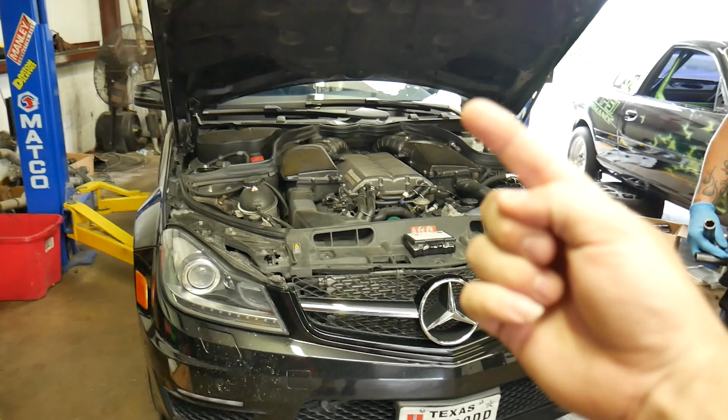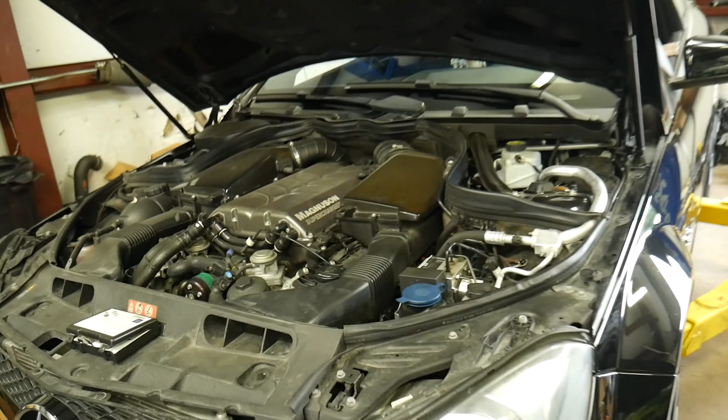Let's step inside the shop and see what we got cooking this week. I'm sure you'll remember this car, but the Supercharged Mercedes is back. I don't know if you guys remember, but I'll put the link up top of the video for when we put this Magnuson Supercharger on this Mercedes-Benz, probably close to 4 years ago now. Since then the car's been back for small things throughout the years. I think we've done plugs on it once.

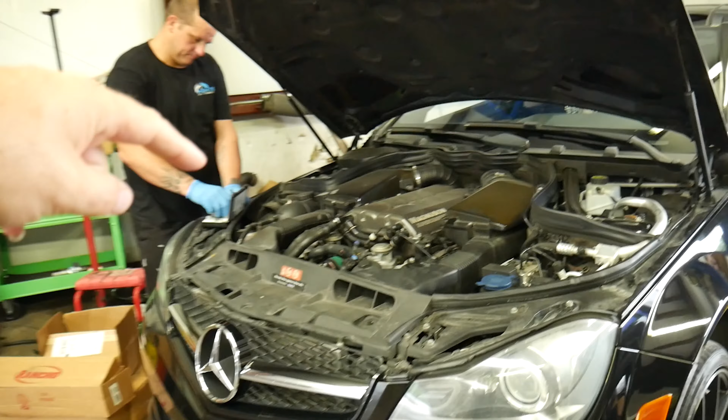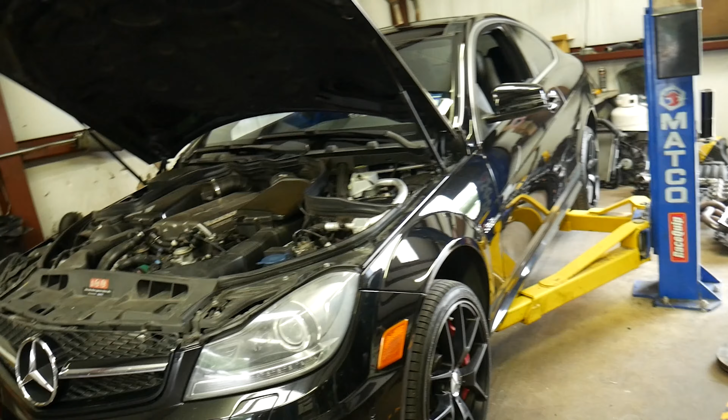I'm not sure, but anyways the car is back. Today we're going to be changing some pulleys, not the boost pulley, but some of the idler pulleys for the belt. We're upgrading those to metal pulleys, getting rid of the plastic stuff, and then we're doing some suspension work. I think we're replacing the shocks all the way around. So that's what we got starting off this fine Monday morning. Hopefully we get our new camshaft in for our Challenger right there. That's what we've got going on. Let's get it started.

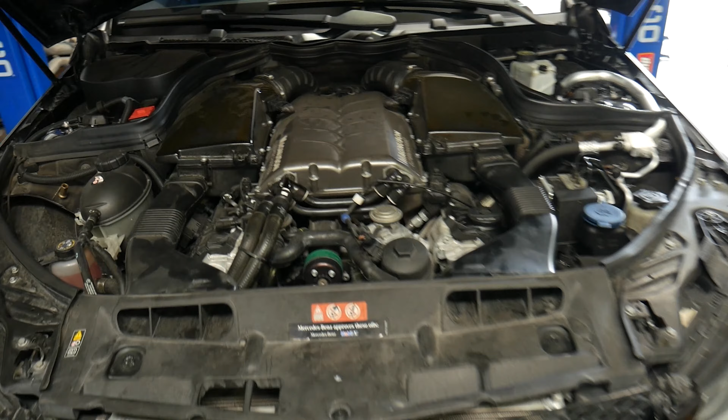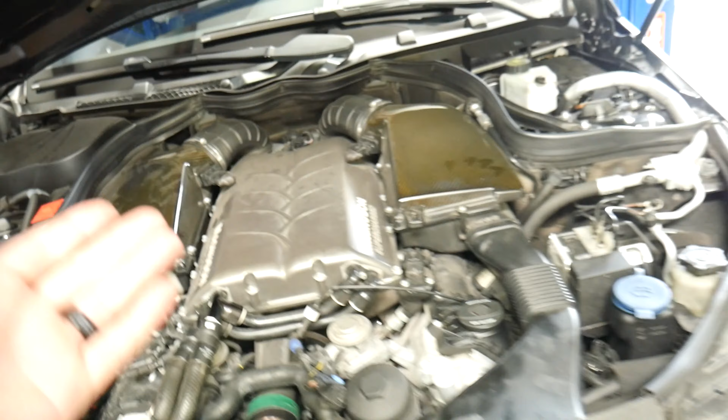So guys, we went ahead and got all of our pulleys changed. Basically every pulley except for the blower pulley and the harmonic balancer got upgraded to a new metal pulley. Now that we've got all of that on there, unfortunately the suspension components the customer supplied were wrong, so we did not end up putting new shocks on this thing. So that is it, we're done with the Mercedes. We're going to fire this one up, get it back outside, and get on with our next project.

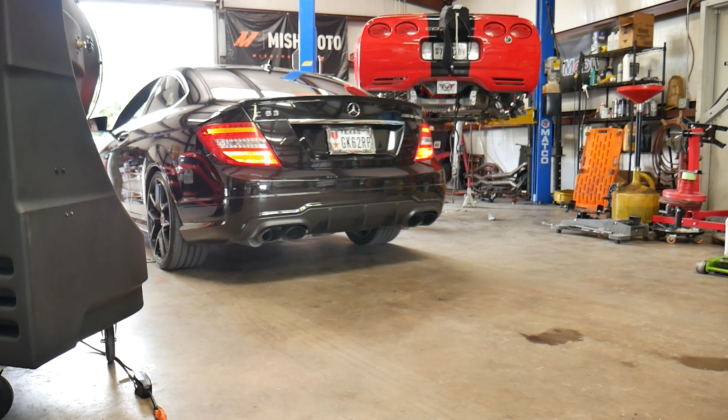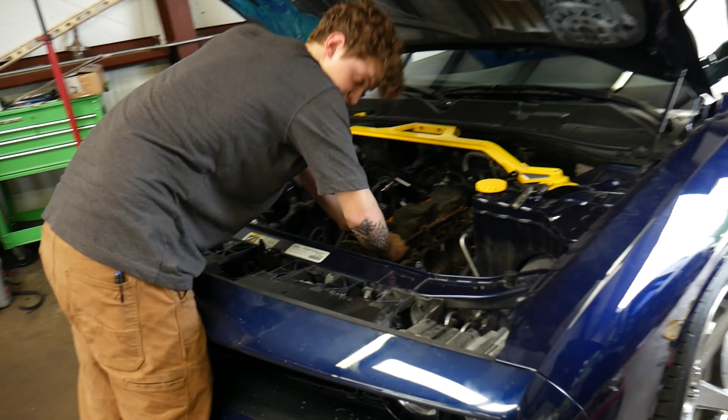As we move forward through our day, we've got the ECU working in our Procharged car, so I'm going to get to tuning that. John is over here working on Royce's, getting the axles put in. And as you can see, we've got somebody new over here. Lane, say hi to everybody. This is Lane, he just started with us last week, and he's working on getting our surfaces cleaned up because we should be getting our new camshaft for this thing in. So he's getting everything cleaned up in preparation for that.

So let's go ahead and get to tuning on this Procharged Charger. Okay guys, so I've got the initial changes made in the ECU for the Procharged setup. We're going to go ahead and make our baseline run and see what kind of power it's going to make.

So guys, we did end up checking with the customer, and it was running 89 octane instead of 93. So we pumped some of that out and put in 6 gallons of 93 octane. Now we're going to go ahead and get back to tuning.

Alright guys, that was a nice clean run. Let's take a look at what we made on, really this is our third pull, but let's take a look at it. So we made 463 horsepower, 492 foot-pounds of torque. Very nice. Let's see how close we can get to 500 on the wheel with this thing.

Another nice clean run, and we're about there. There's not much more to go. You know, stock engine, we're going to keep the timing real conservative. Air fuels are looking really good, and it's making clean power.

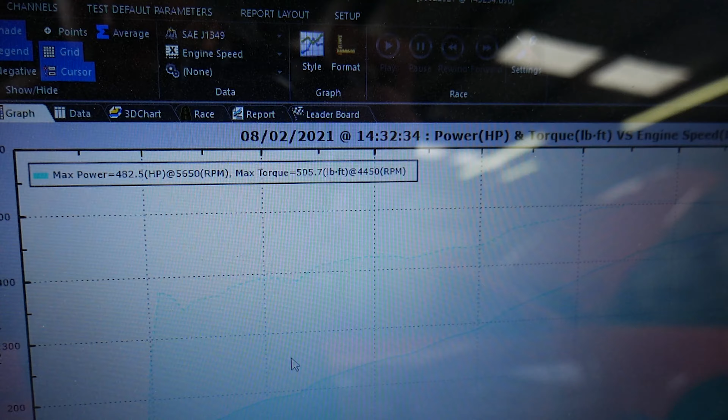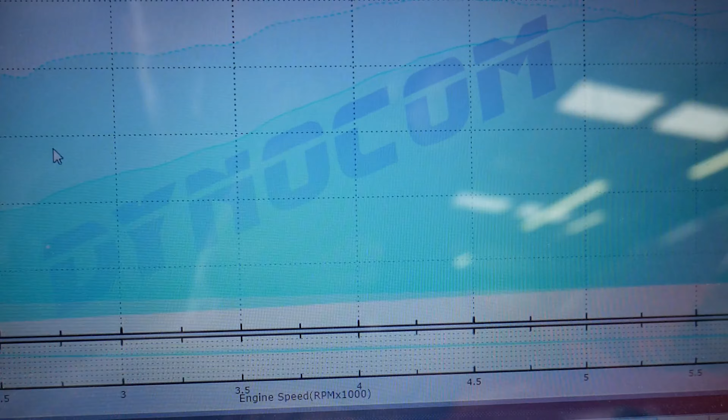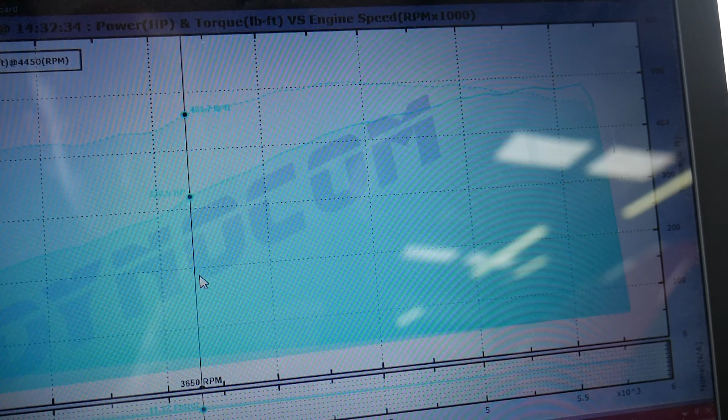So that last run, focus out: 482 horsepower and 505 foot-pounds of torque. Graph is looking really nice. And if we look a little tighter in here, we can see our air fuels, nice and clean. I'll lean it out a little bit, might clean it up a shade more, but right at mid-11s.

So let's step inside and take a look at the runs.

We're in HP Tuners here. I know I don't bring you guys inside very often, but I know some of you want to learn some stuff, so let's take a peek here at what we got on the screen.

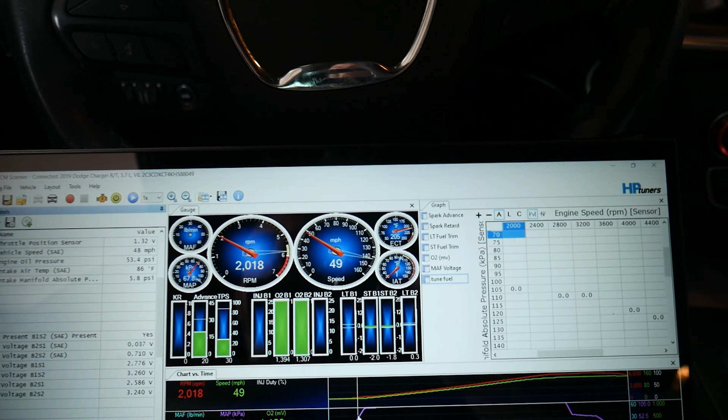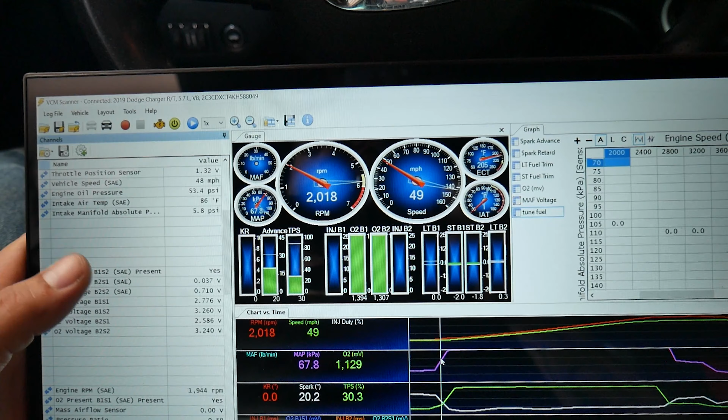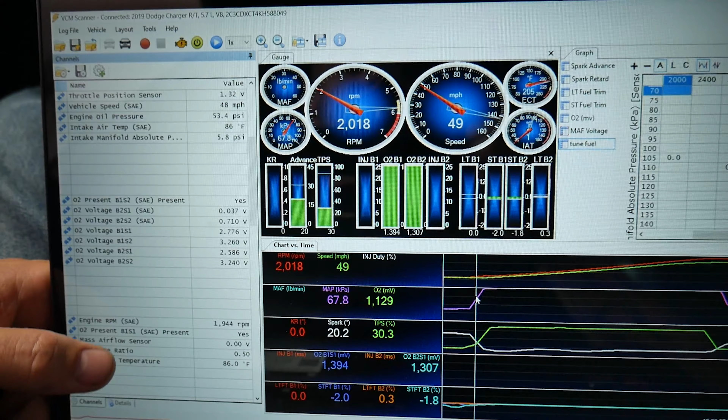Things I like to see pretty quickly: throttle position, vehicle speed, engine oil pressure, intake air temperature, and manifold absolute pressure so I can see how much boost we're running. We've also got oxygen sensor voltage readings, engine RPM, mass airflow volts, pressure ratio - if you know anything about tuning Dodges from back in the day, pressure ratio on the neons is an important table - and charge air temperature.

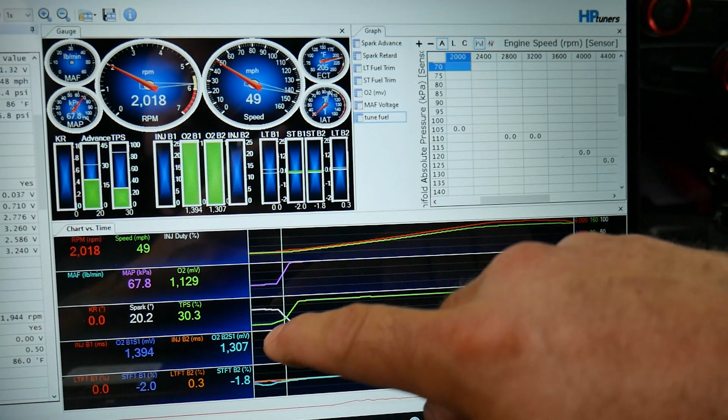Over here we've got map, RPM, oxygen sensors, and our long-term and short-term fuel trims.

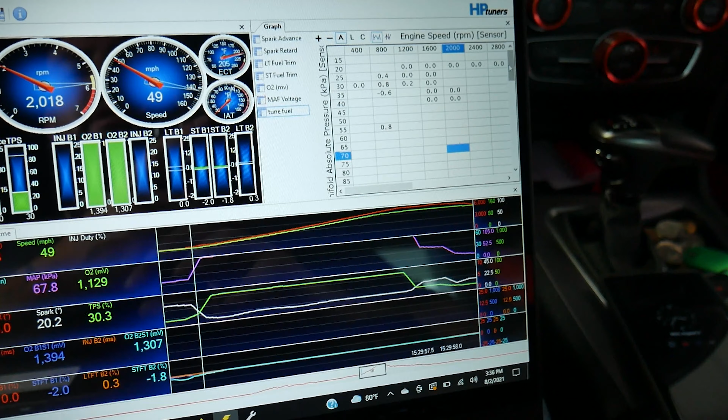Tune fuel over here is a table I built for doing Hemis - basically absolute pressure versus RPM. With this table, especially with the neural network turned off - not in this car, I didn't turn it off here, but if I'd done a camshaft, I would have turned the neural network off.

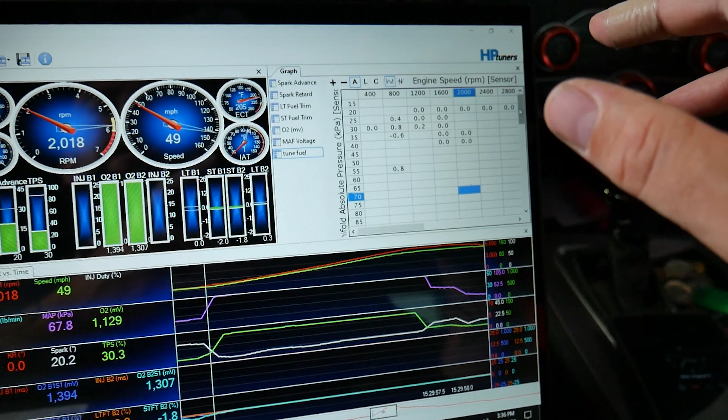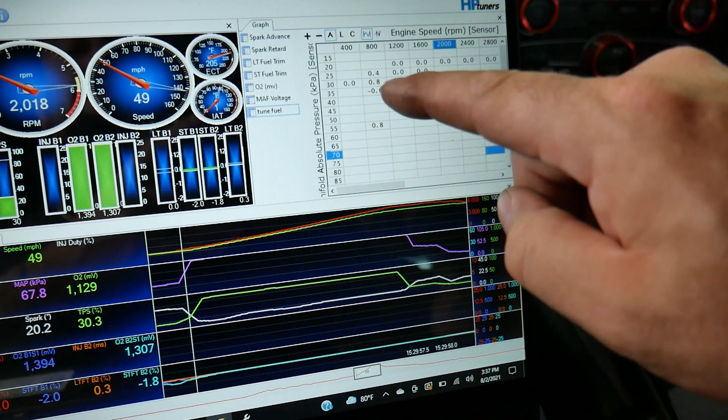But anyway, I use this table to help dial in the fuel table quickly because I can see plus or minus on your long and short term trims. This table is set up to identify the long-term fuel trims on both banks, take an average of those, and show RPM versus pressure.

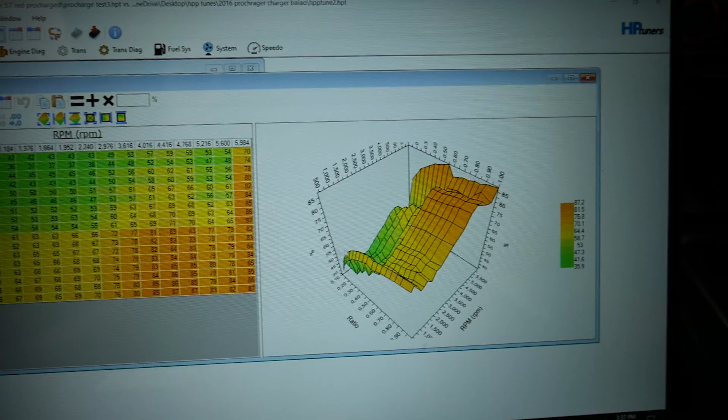Then I can copy and paste this table into - let me show you guys - airflow, speed density, VE. So this is what the VE table looks like, the factory VE table, or what it looks like.

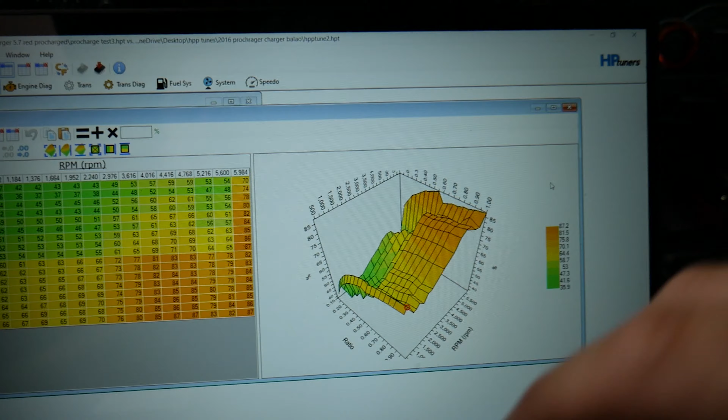I'm not going to go into explaining the neural network because there's a lot to it, but basically if I were to go in and start changing these numbers, it would have little effect due to how the neural network system works in these newer Dodges.

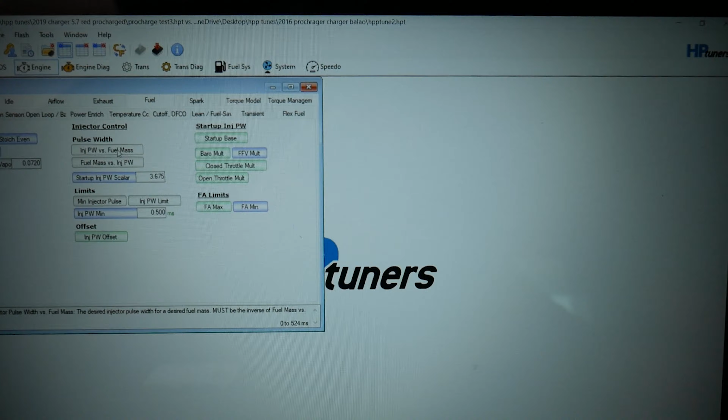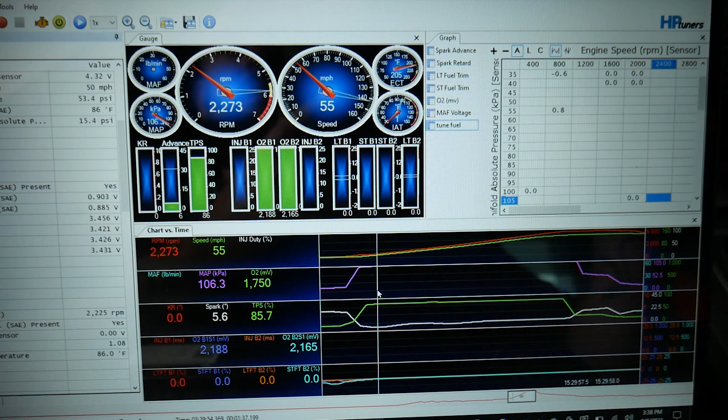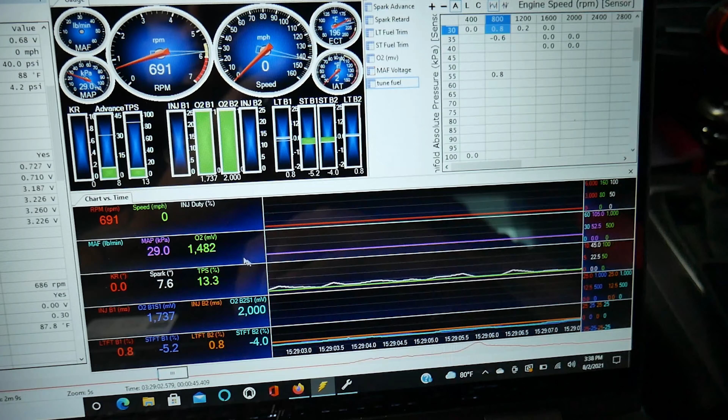We just did a blower, that's it - everything else is stock headers, stock cat, stock exhaust. So we're able to leave those systems on, and as you can see, our fuel trims are really nice, plus or minus 5%, barely even kicking on the long terms at all. Everything looks really good on the fueling.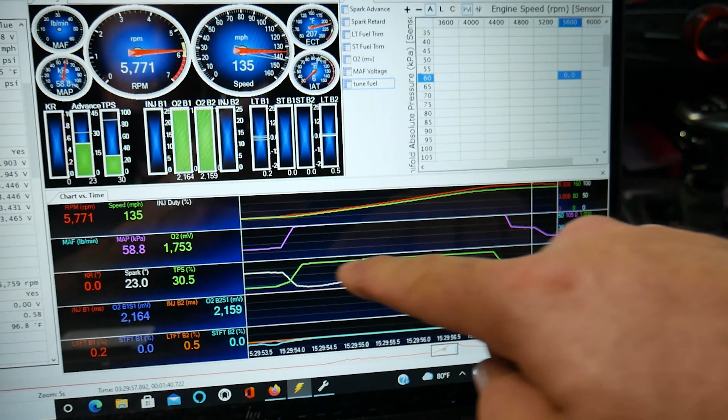Let me get back over here to where we were making the run on the dyno. Our green line here is TPS, and our white line here is our ignition timing. As soon as we smack the throttle, we pull the timing out of it, then slowly ramp it back in, holding about 23 degrees all the way to redline.

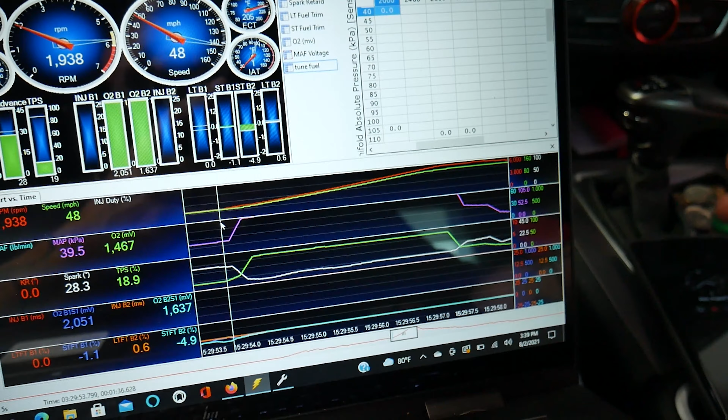But I just wanted to show you guys that real quick, and we're going to let the car cool down.

I'm going to go over a few more things on the map, but I think we've got this one wrapped up. Time to unstrap it from the dyno and take it out on a test drive. So I'll let this cool down.

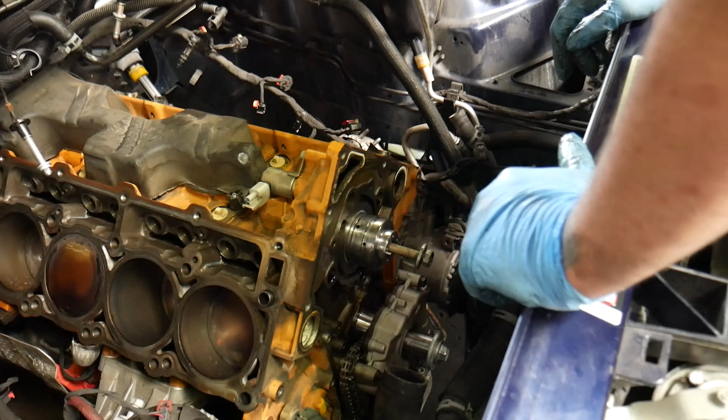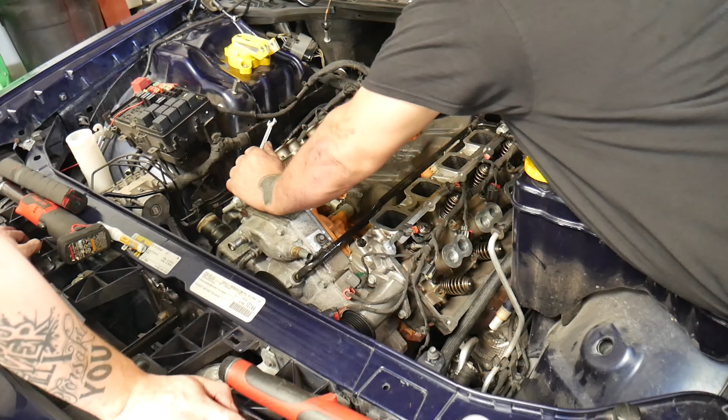UPS showed up and we got our Comp Cam 270, and it looks like John is finishing stabbing it into the motor. So moving right along with our Tuesday, John and Lane are over here getting the heads torqued back on our Hemi. We got the cam and lifters in, all that stuff yesterday, came in this morning and got the heads slammed on this thing, and hopefully by the end of the day today we'll hear this thing fire up.

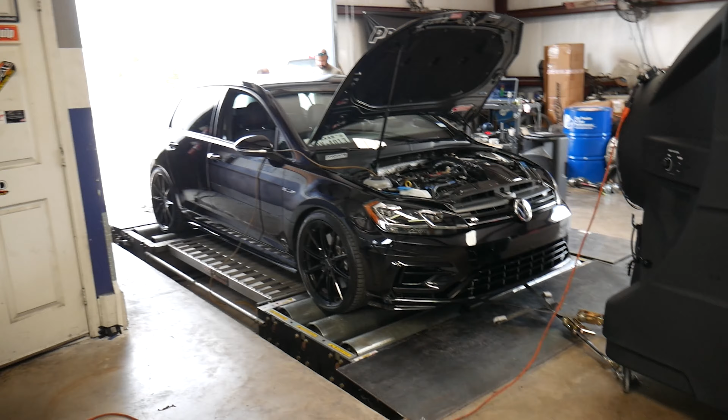We also have this beautiful Golf R on the dyno. They're renting the dyno, getting some tuning done, but I'm going to run the machine for them. We probably won't see the power pulls or the horsepower and torque numbers - they'll probably keep those to themselves - but I'll at least record some of the runs for you guys. So let's get after it.

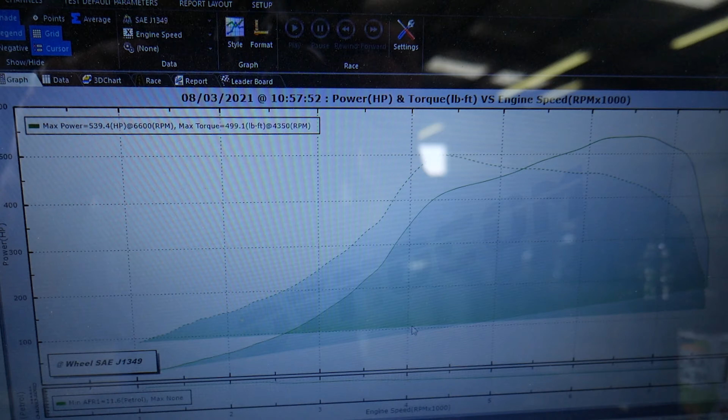So guys, unfortunately our tuning session on the Golf R was cut short due to some ridiculous requests by the remote tuner. But anyways, here's the graph: 539 and 499. Very impressive Golf R.

It's a wonderful Wednesday morning, and as you can hear, we chopping, baby.

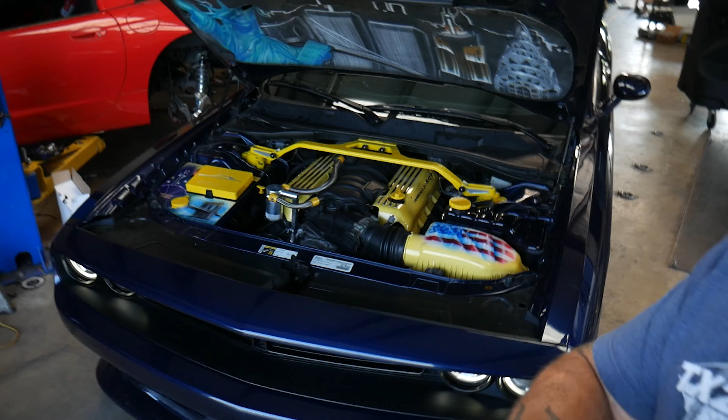The Challenger is all done. We replaced that bad lifter with a fresh set of Hellcat lifters, and replaced the bad Comp Cam with a brand new Comp Cam 274. He's back to purring like a kitten - nice and quiet.

So that's going to wrap this one up. We're going to take it out for a test drive and get this one back to the customer.

So guys, moving forward with our week, we had another car dropped off that was on the schedule for today, out of Austin, about an hour away from here. This is a 2015 Charger - customer installed HRE long tubes, mid pipes, exhaust. The rear muffler's been removed.

As you can hear, it's got a nice base map in it. It's got a Texas Speed Stage 2 camshaft, a Mopar intake, and he also installed a set of Hellcat injectors. The car's going to be on E85, so we're waiting on the customer to bring back some E85 for it. We'll drain it out, put some E in it, and get to squeeze on this thing and make some power. So let's get after it.

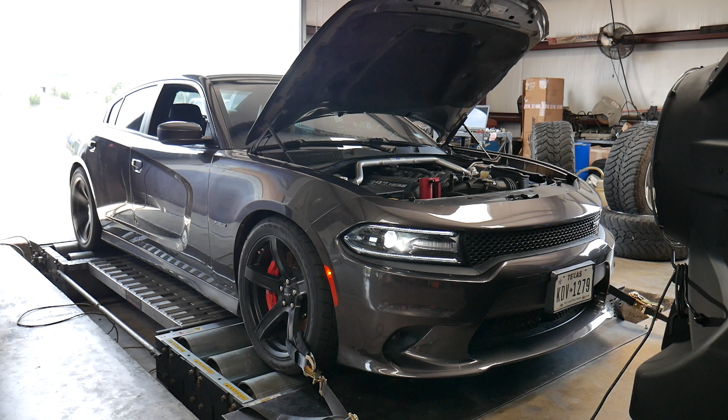So guys, as you just saw with that power pull, let me take you guys over to the computer so you can take a look. I've already made a couple of pulls, got this thing dialed in on some E, and this is where we're at so far.

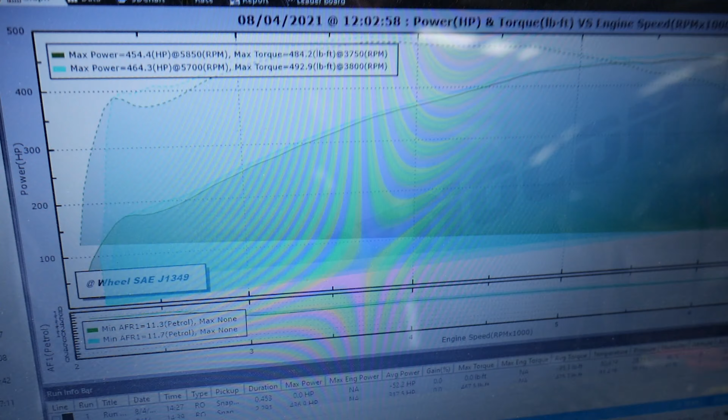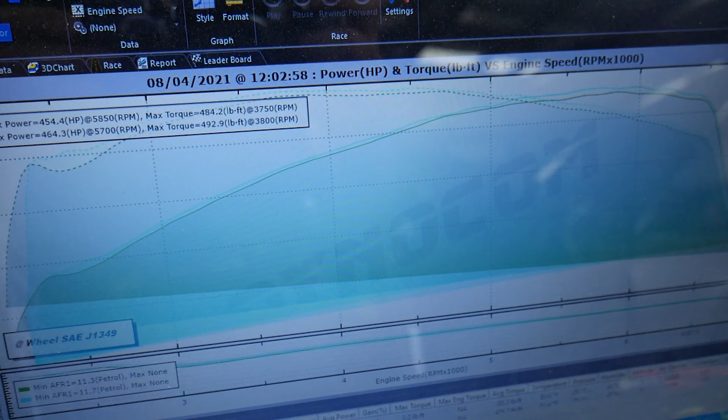Still got some work to do, some cleaning up to do, but already off to a great start. So I'm going to hop back in here, get these fuel trims dialed in a little bit tighter, and then start sprinkling in some timing.

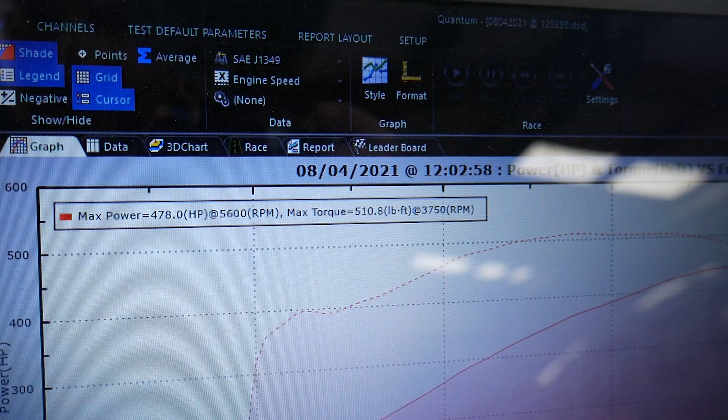Guys, that's going to wrap this one up. That last pull looked really good - this thing's making some nice clean power. I'll take you over here to the screen to see what we finished out at: 478 horsepower, 510 foot-pounds of torque. Graph looks good, air fuels are rock solid. He's a winner.

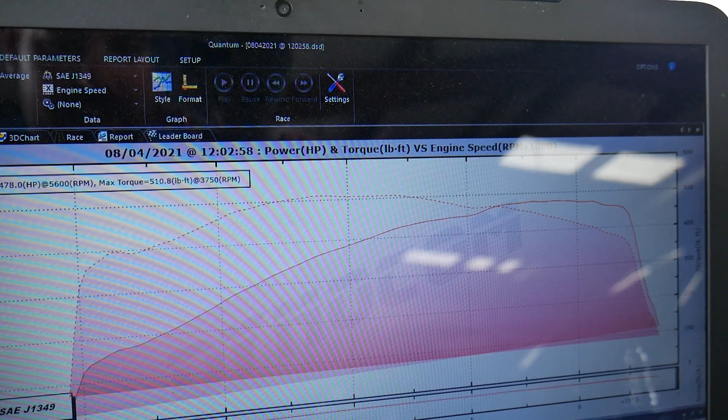So guys, I'm in here early on a Friday morning, a couple hours before everybody else gets in.

We're going to go ahead and get our transmission stabbed back into the Gremlin. We've got our twin disc in there, and then yesterday I got a new fork, and I already had the new throwout bearing, so got all that stuff situated. Going to lube up my shaft and stab this transmission back in - this Liberty Gears one-inch, 23 spline.